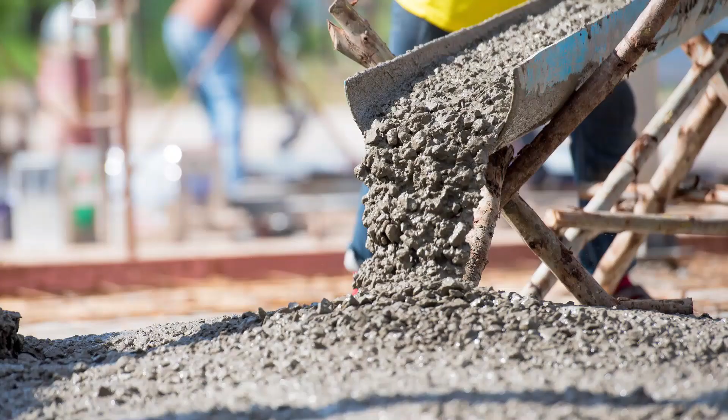So why concrete? People always ask me. Like most people here today probably have no interest in concrete whatsoever, or weren't really sure about it, or just know it was grey. So that was kind of me in 2014 when I started my degree. What I enjoyed about concrete was the complexities of concrete and how it can be manipulated for its intended use. And also because concrete is fantastic. And for me as well, I wanted to go into materials because I was very interested in sustainable development, and I knew that materials engineering would probably pioneer this. So that's a very brief introduction to me.

So name something that you know that's made out of concrete. If you type it in, it will come up on my screen.

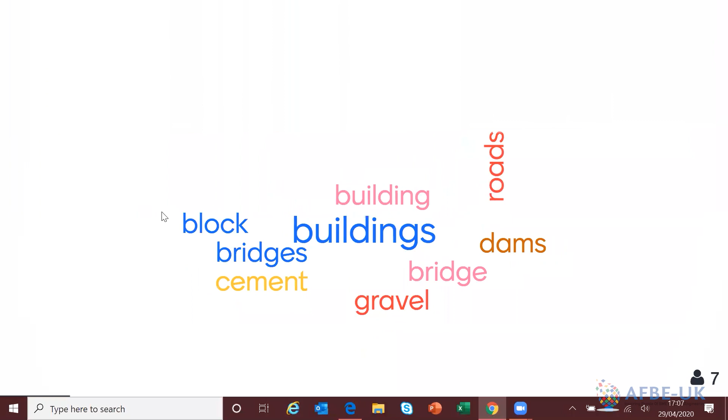So as you can see, there were various different infrastructure and buildings that people were talking about. So concrete is actually the most used man-made construction material in the world. And knowing that, you saw that there's different things that concrete can be used for. We can now know that not all concrete is the same. You can't use the same concrete for a building that you'll use on the road. And also, if there's one thing I want everyone to take away today, even if you don't listen to the rest of this, it's that cement and concrete are not interchangeable terms.

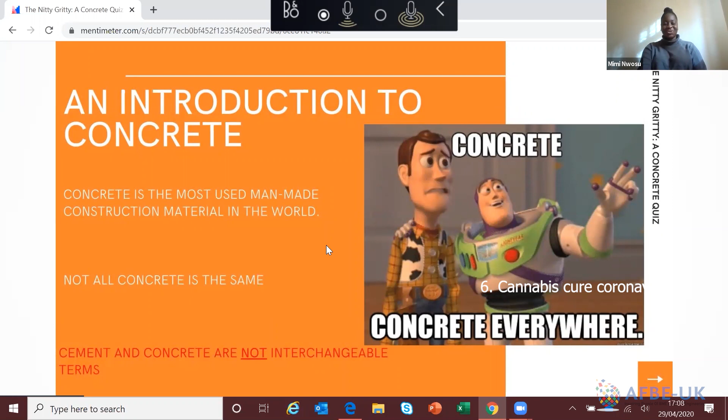If you want to annoy a civil engineer, mistake cement and concrete. They are not the same, but I'll delve into that later. So the quiz: just as I did now, I'm going to ask a question and then give you a couple of moments to answer it. And then after that, I'll give an answer straight away, and that's how the quiz will continue.

Like I said, you don't have to be a concrete whiz. Please just give it a try. It's just all a bit of fun. So let's get cracking. That is my first concrete joke, and it's the best one I had.

So question 1, what are the primary components of concrete? Is it A, cement, wood, aggregates; B, cement, water and silicone; C, cement, water and aggregates; or D, cement and water? Now, before you answer, for the non-civil engineers amongst us who are not really sure, aggregates are things like sand, gravel and crushed rocks, etc.

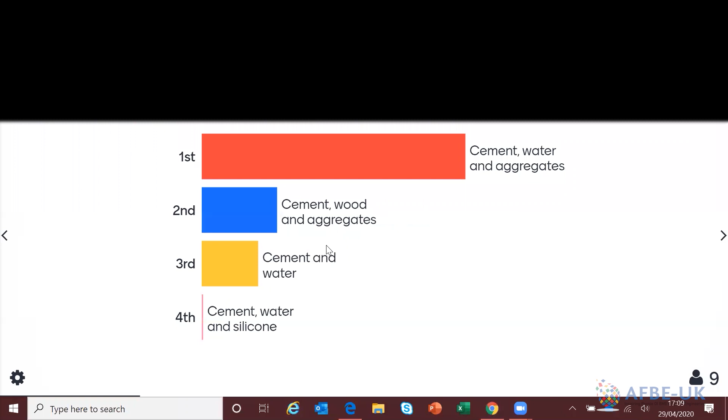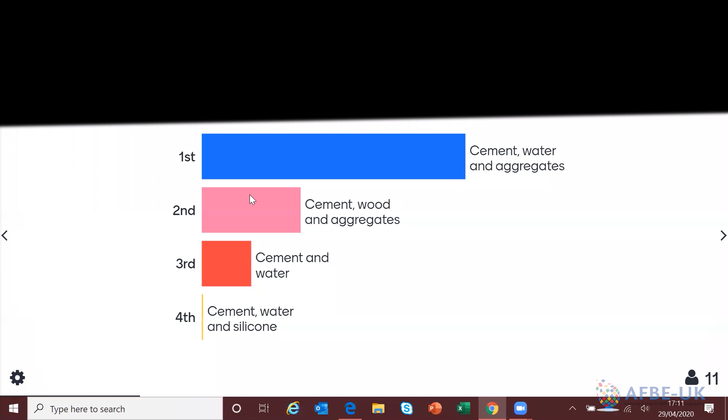Most people did all right. So the primary components of concrete are answer C, cement, water and aggregate. Congratulations to those who got it correct. So concrete is actually a mixture of 2 components. It's a mixture of aggregates and a paste, that paste being made up of Portland cement and water.

As you can see on the diagram on the left, it's made up of 8% air, 7 to 15% cement, 14 to 21% water, and 60 to 75% aggregates. Now, I like to liken making concrete to baking a cake. So I'm going to use the analogies together. I hope no one gets confused.

So with concrete, like a cake, you get all your ingredients and mix them together. You put your ingredients in the concrete mixer and mix them. Then after that, you put them in concrete molds. The molds can either be long steel beams, cylinders, or cubes. These three types of mold are used to imitate the structural components that can actually be built on site: long beams, some sort of cube, or a cylindrical shape.

Once that is completed, they'll be put on the vibrating table, which has its British standards. So why do we put them on the vibrating table? Because you want to remove any air bubbles or inconsistencies within your concrete and make sure your concrete actually sets in the right shape of the mold. Once that is complete, you leave your concrete to set overnight, and then you put your concrete into a curing tank.

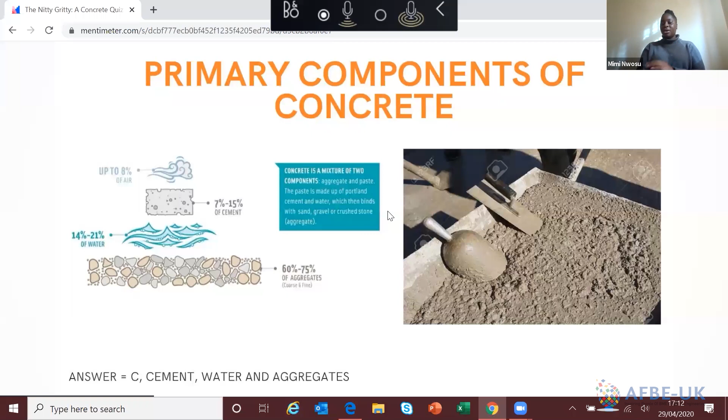So like a cake, you get all your ingredients, mix them together, put it into the baking tray, and then put it in an oven. However, an oven and a curing tank are not the same thing, but we'll get back to that later. So back to the beginning, I said that concrete and cement are not the same thing. Cement is an ingredient used inside of concrete, and concrete is the final product. I hope that's more than clear now.

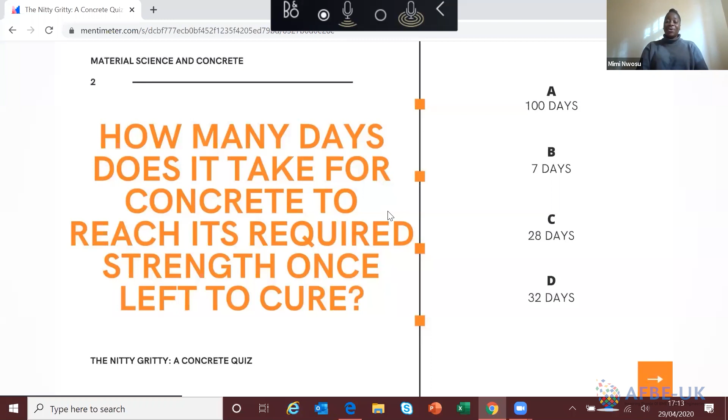So the next question is, how many days does it take for concrete to reach its required strength once left to cure? Like a cake, you put it in an oven. Cakes obviously take a couple of hours, unless you leave your cake in for days. Don't tell us, just keep that to yourself. But concrete takes a number of days to reach its required strength. So how many days do you think? Is it A, 100; B, 7 days; C, 28 days; or D, 32 days?

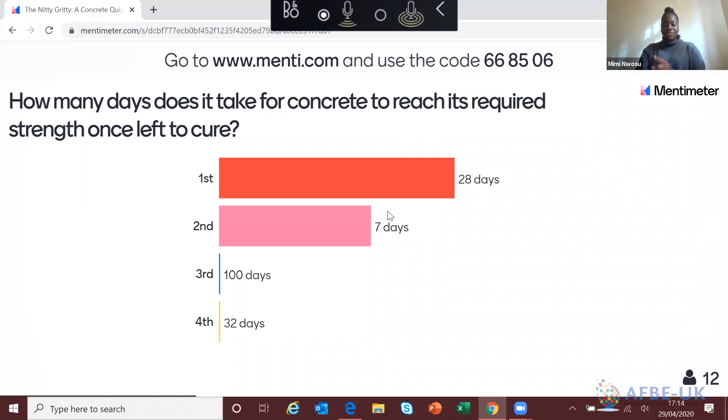So the answer is actually C, 28 days. I think it's important to understand what is actually happening during those 28 days, what gives concrete its compressive strength. An important thing to know as well is that concrete doesn't dry over time, it hardens over time. But I will come back to that later on.

So what is curing? Curing is defined as providing adequate moisture, temperature, and time to allow concrete to achieve its desired properties for its intended use. So there's water in the tank, and this water is about 20 degrees-ish. So what's happening inside of the concrete? In the curing tank, a reaction takes place between the water and the cement.

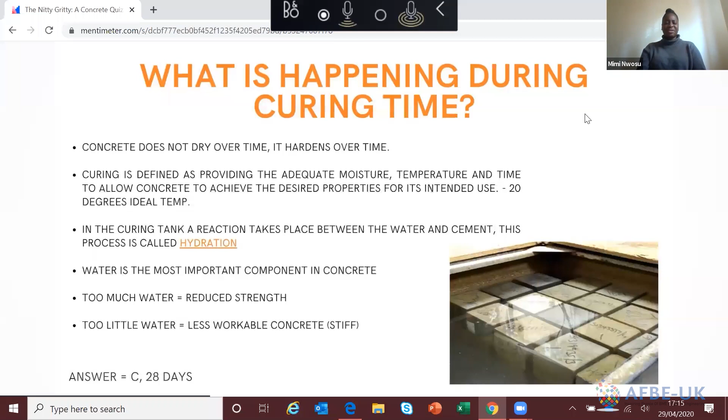This is called hydration. So back to my first bullet point about concrete not drying over time, but hardening. If you were to dry concrete, that would imply that you're actually removing the water from the concrete, and that's not correct. Because water is actually the most important component in concrete, so it's essentially needed. So too much water would reduce the strength of the concrete, but too little water will make the concrete very stiff. So it'll be hard to pour on site, hard to put in the mold, etc.

Now, let's get to the science. What I think is important when I explain about hydration and cement is that it's very important to understand the chemical composition of cement to understand hydration. So typically, cement is made up of 5 compounds. However, I know 2 of them. And thank God, because the 2 of them I'm going to talk about are the most important ones. They're called tricalcium silicate and dicalcium silicate.

So most people hear in the engineering world that with concrete, the first 7 days of the curing process is the most important. The fastest part of the reaction is. And tricalcium silicate is responsible for 7th day strength. Dicalcium silicate is responsible for the later strength. So what happens? Tricalcium silicate in the cement, when it reacts with water, produces hydrates and hydroxides and also releases some sort of energy. When the hydrates and the hydroxides are produced, they form chemical bonds, therefore compacting the concrete much more, therefore giving it strength. Now, that's in the first 7 days.

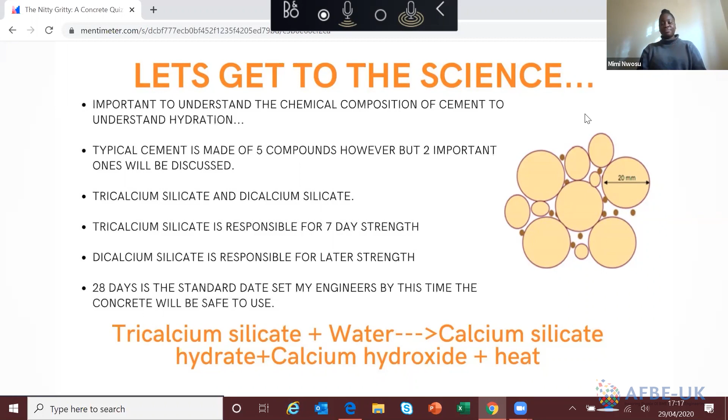So dicalcium silicate is responsible for the 7 to 28 day strength. Essentially, they have the same reaction with calcium silicate, with hydrates and hydroxide ions. However, it also combines with the 3 other compounds in cement. And this happens at a later stage, but it also happens at the beginning as well, it just happens much slower. And that's what's happening.

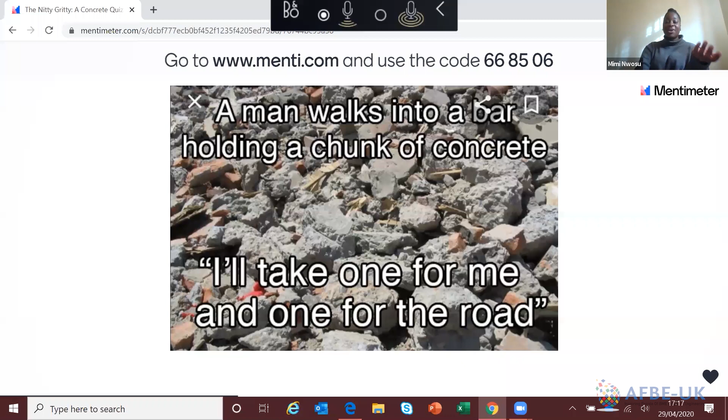So as I was doing this quiz, I found some concrete jokes along the way. I hope people understand, but a man walks into a bar holding a chunk of concrete and he says, "I'll take one for me and one for the road." Sorry, I found that funny. Maybe it's just me. Obviously, I can't hear anyone, but I hope everyone is falling off their chairs right now.

So we all heard in the news the environmental impacts of concrete. Concrete's not good for the environment, etc. But why do you think concrete is not good for the environment? Is it A, waste concrete is thrown into the sea? B, when concrete is poured on site, it releases toxic fumes? C, the production of cement releases carbon dioxide into the atmosphere? And D, concrete removes oxygen from the atmosphere?

So the answer is answer C, that cement production releases excess carbon dioxide into the atmosphere. Someone has asked me recently, if there's already carbon dioxide in the atmosphere, how does cement production affect the atmosphere? And I said, okay, well, excess. Anything in excess is not good. When you increase levels of carbon dioxide in the atmosphere, this increases the rate of the greenhouse effect. Now, I'm hoping everybody knows what the greenhouse effect is, because that is another webinar, and it's not this one. So essentially, it increases the effect of global warming, so it heats the earth up.

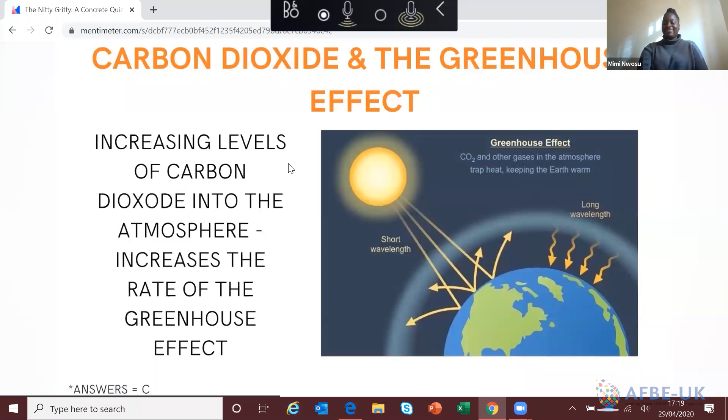So now that we know that it's carbon dioxide that is causing an issue with the atmosphere in terms of cement production, approximately what percentage of the world's carbon dioxide emissions do you think are sourced from cement production? Is it A, 8%, B, 5%, C, 45%, or D, 21%?

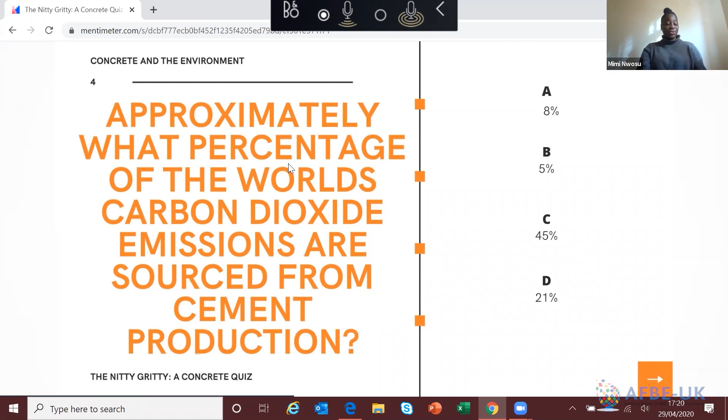So the answer is A, 8%. I really do believe if it was 45% of the world's carbon dioxide emissions, we wouldn't be using concrete ever again. So importantly, I think people should know how cement is produced. If it's causing this much problem to the environment, we should know how cement is produced. Portland cement is an industrial standard cement that we tend to use. And it's a mixture of burning limestone and clay together at extremely high temperatures. Limestone is quarried, it's crushed into small pieces, and it's mixed with sand, clay, and iron. Then it's ground to form powder, and this powder is called cement.

So cement is very, very important to the concrete industry because it's actually used in 98% of concretes globally, with 4 billion tons produced each year. So this is clearly an issue. So what happens during this? When limestone is heated at high temperatures, it goes through a process called calcination. Therefore, the limestone is calcinated, producing CaO, which is lime, and waste CO2. So as you can see in the equation below, it's the waste CO2 that's causing the problem. There's nothing that we can do with it. It just goes straight into the atmosphere. And that's that.

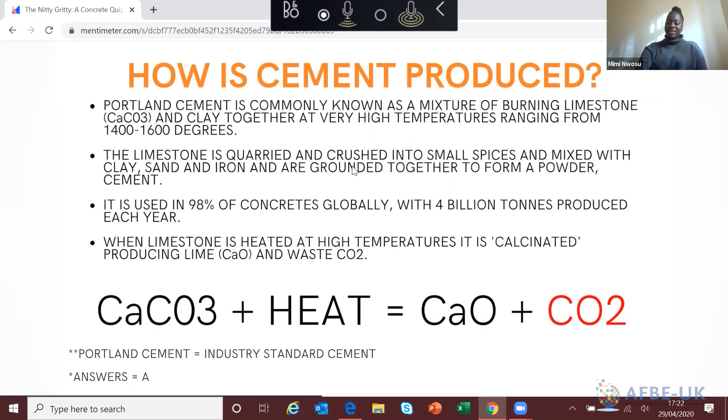Next question. So does concrete work, so normal concrete, just bog standard concrete, work better in tension or compression? So is it A, tension, B, compression, or C, tension and compression?

I promise you I will not play the music again.

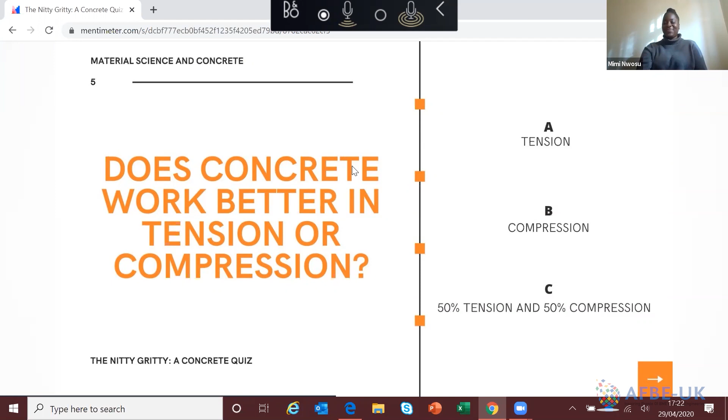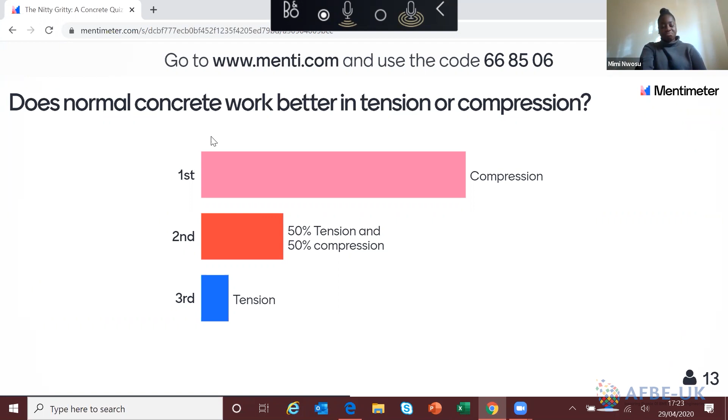Okay, so most people said compression. Cool. Right, so for the non-physicists amongst us, I think people would like to know what tension and compression forces are. So basically, every material can handle a certain amount of tension and compression, and these are called stresses. So a tension force pulls materials apart, and a compression force squeezes materials together. So that's the very bog standard, basic way of explaining both of them.

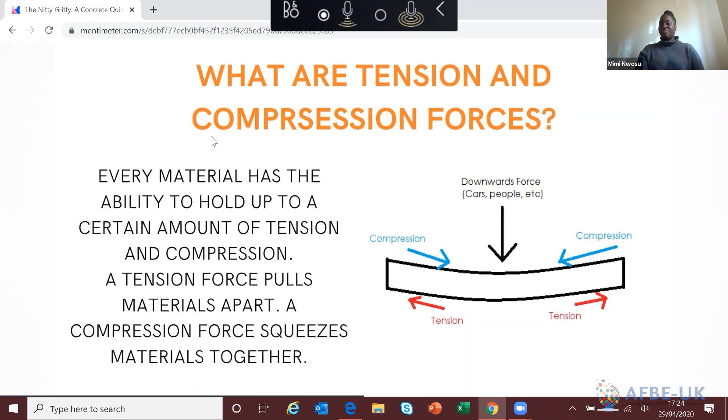So why is concrete better in compression than it is in tension? So concrete is great because it has this high compression resistance. So it's able to support loads of weight. So hence why loads of building foundations are made of concrete to support your buildings such as the Burj Khalifa, etc. So this is due to the concrete's compact nature. It has adhesives and aggregates adding to the friction factor, so it resists compression.

So essentially, when you stand on concrete, it doesn't collapse because you have to push down on the cement and also the aggregates to really push down to get to the bottom of it. So it takes longer to do that. However, if you smash concrete with a hammer, it only has to pull apart the adhesive factor, which is the cement. And that's the only thing that is resisting that tension, just the cement holding it together.

However, concrete alone is a very brittle material. So just normal concrete, if you smash it, like I said, it falls apart. So in building design, a composite material is used to counteract that concrete is weaker in tension. Actually, top tip, concrete is actually not weak in tension, it's just stronger in compression. So what we tend to do in building design is that we reinforce concrete with steel bars, and this concrete is now called reinforced concrete.

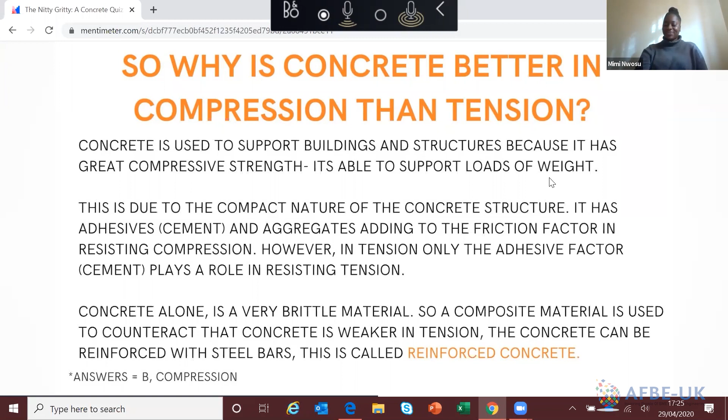So what is reinforced concrete? I'm sure somebody asked, I heard it, although everyone's on mute. So reinforced concrete is essentially putting steel bars inside of concrete. So if you look at the picture on the left, that is what we do on site. Those steel bars are designed by engineers, so they don't always look the same. It's dependent on the building size, the surface area, the amount of load your building has to take. So this affects the length and the thickness and the shape of those bars.

So they lay them down like so, like you see in the picture on the left. Then after that, you get your concrete pump and you'll pour your concrete on top of that. So what happens is, when the concrete is poured on top of it, it hardens around the steel and it forms a very strong chemical bond. So now it's a composite material. The concrete will resist the squeezing, which is the compressive strength, and the steel will resist the bending, the tensile strength. So now your reinforced concrete is good in tension and compression.

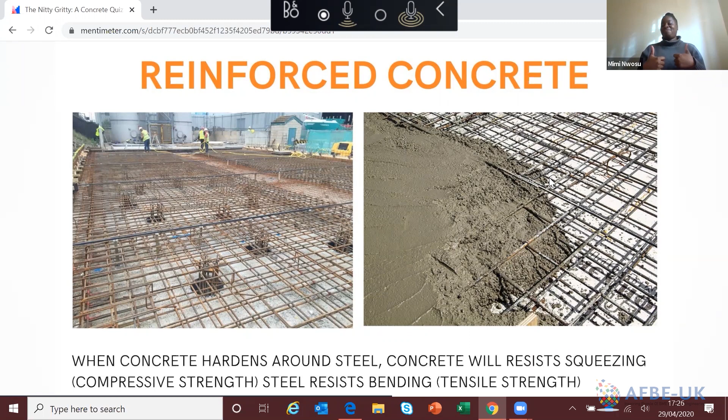Next question. So most of us have done science or done scientific experiments. You know, there are British standards associated with everything that we do. This is the same for concrete. So what do you think are the British standards that are used for concrete? Is it A, the BS 8500 and the BS EN 207, B, the BS 6500 and the BS EN 203, C, the BS 6501 and the BS EN 206, or D, the BS 8500 and the BS EN 206?

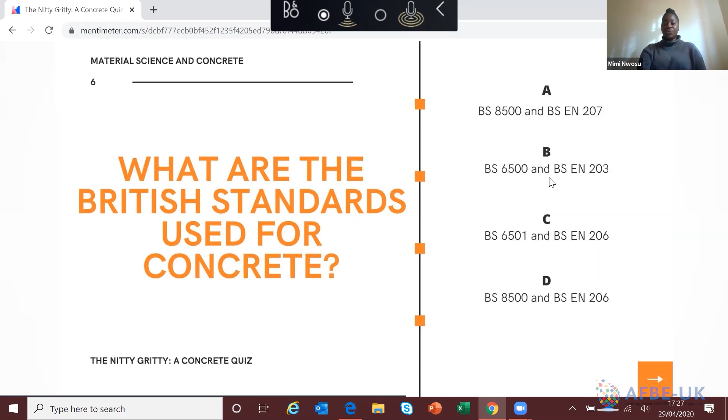So the British standards that we use are the BS 8500 and the BS EN 206. So that was answer D. So what is the BS EN 206? So this is the European standard for concrete. Essentially, it specifies requirements for constituent materials of concrete, properties of fresh and hardened concrete, and their verification.

So what does that mean? So essentially, if you want to design a concrete of a certain strength, it will tell you the materials to use, how much water to put in, what type of cement to put in, and also the tests that should be conducted on it when it's fresh and when it's hardened. And also, if you receive a concrete from your concrete producer, if you want to verify that your concrete is the concrete that you've asked for from them, it tells you how to do that too.

Now, the BS 8500 is the complementary standard to the BS EN 206 and is split into two parts. So essentially, if the BS EN 206 is this big, the BS 8500 is in two parts, but it's much smaller. So which one does everyone think I'm reading? I read all of them. So the BS 8500 is essentially the same thing. So part one is the guidance for the concrete buyer.

So if my organization asked another organization to make us some concrete, it describes how, when they send it back to us, we can verify that the concrete is what they've said it is.

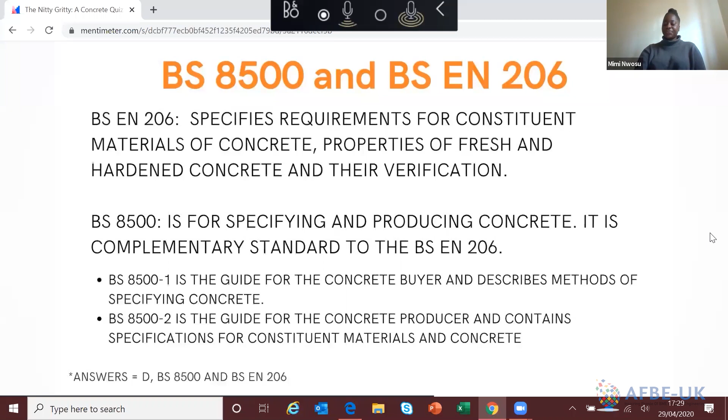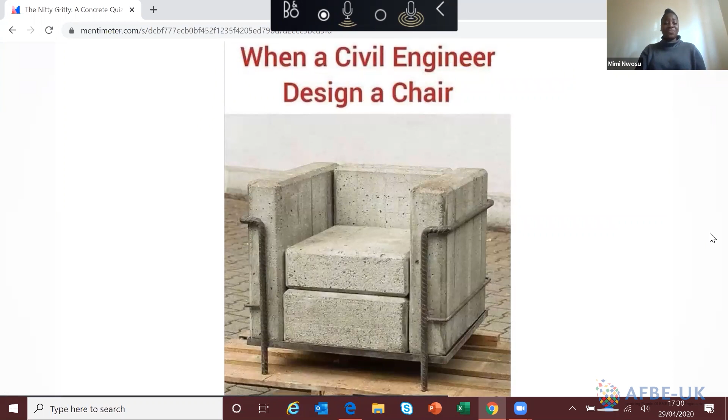So I personally didn't design this, but I found this on Instagram and I did giggle for a few minutes, and I'm sure everyone else is laughing as well. However, everyone's on mute, so I can't hear. They're laughing. Next question. Huh?

They're laughing. Question 7. Which of the following is a test that can be conducted on fresh concrete? Is it A, the California bearing ratio, B, a slump test, C, the compressive strength test, or D, the plasticity index test? So I'll give people a few minutes.

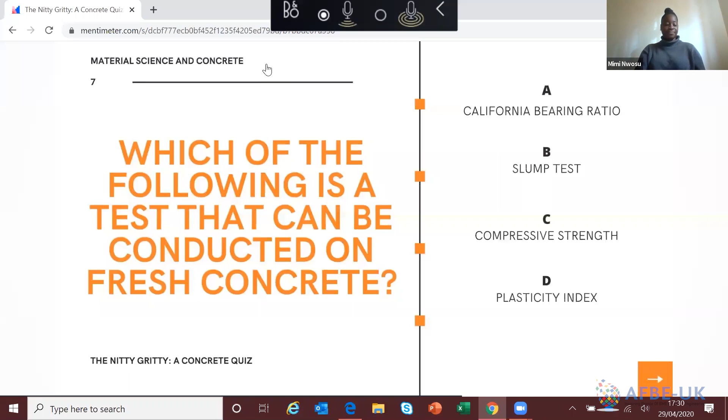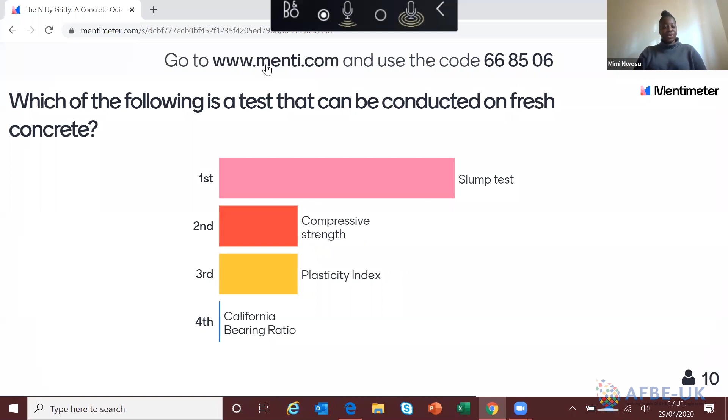So the answer is a slump test. So what is a slump test? I heard somebody say there, everyone's on mute. The slump test is a means of assessing the consistency of concrete. So essentially it's a test to say whether you've put the right amount of water into your concrete. As I said in the beginning, water is the most important component when it comes to making concrete, and there's a whole test dedicated to finding out.

So if anybody wants to confirm what I'm saying, you can read the British Standard, which is the BS EN 12350 Part 2, testing fresh concrete, slump test. So how do you perform a slump test? You need your concrete, obviously, your metal funnel, a metal rod and a ruler.

So once you're finished mixing your concrete in the concrete mixer, like we discussed in the beginning, you'll take a volume of that, which you'll find in the British Standard, and then you'll put it into your metal funnel in 3 layers. You put the first layer in, then you use your metal rod and you'll tamp it 25 times. Then you put your second layer in, and again tamp it 25 times. Then you'll put the third layer in, and tamp that 25 times.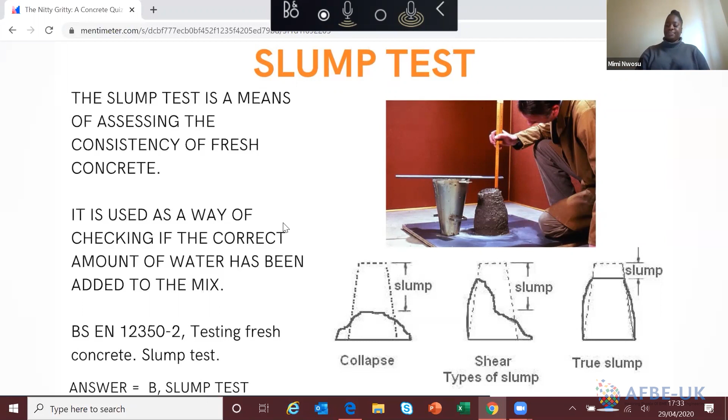So why do we test on concrete? We test on concrete because you want to look at factors such as strength, consistency, the unit weight, the air content, and temperature. So by testing on fresh concrete, you're actually able to detect changes that may affect your concrete long term. So if you have too much water and you start to cure your concrete, then you may not be able to achieve the properties that you actually set out to achieve because maybe there's too much water, but you wouldn't know that if you didn't test it whilst it was fresh.

So essentially you're saving time and money, which is what we want to do in construction. Time and money. Time is money.

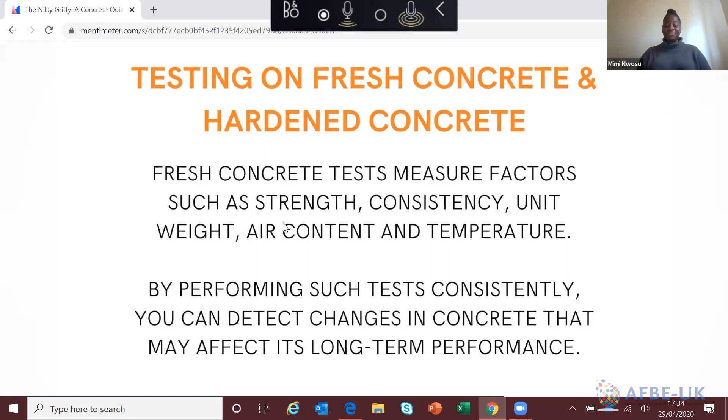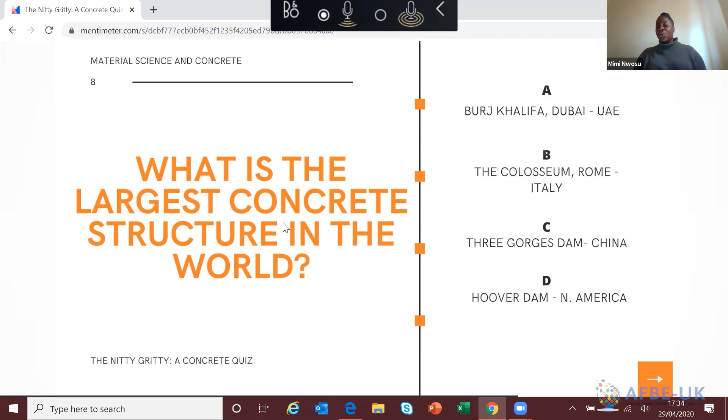Next question. So what is the largest concrete structure in the world? This question will let me see if people have left the UK, left London, ventured out a little bit. I'm only joking. But A, is it the Burj Khalifa in Dubai? B, the Colosseum? C, the Three Gorges Dam? Or D, the Hoover Dam in North America?

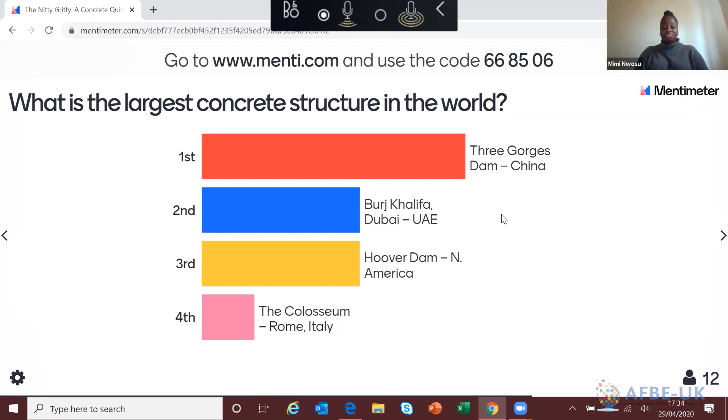So the answer is the Three Gorges Dam in China. The Three Gorges Dam is a hydroelectricity dam, so this generates electricity essentially through hydropower. It was completed in 2003 and it stands at 185 meters tall, approximately 2,300 meters long, and it is 40 meters wide. So that's a lot of concrete, basically. How it generates hydroelectric power, I'm not exactly sure. That is something that we can all go and look up later.

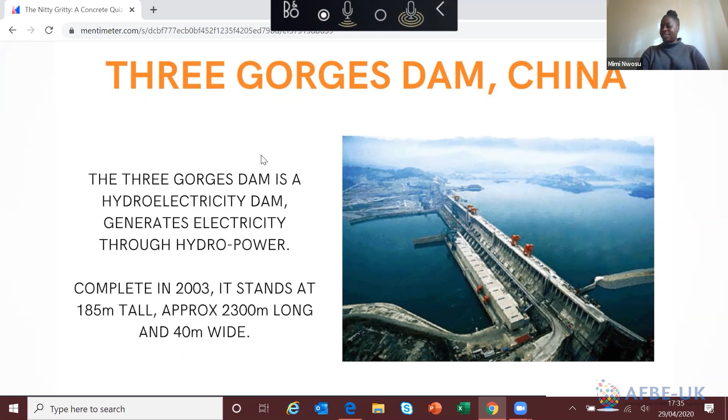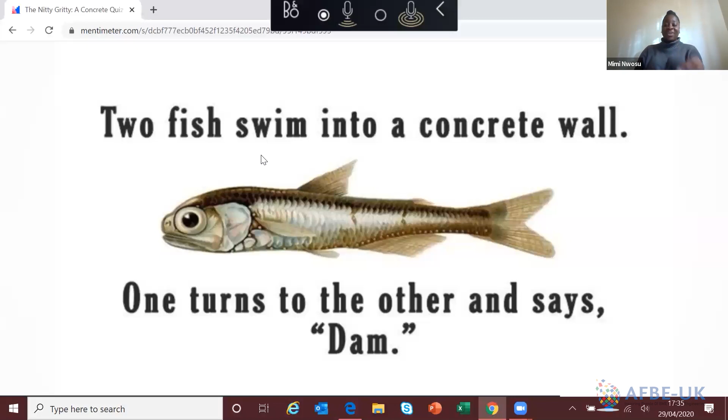So conveniently, as I was looking up the concrete dam, I found this concrete joke. So two fish swim into a concrete wall. One turns to the other and says, damn. Sorry. The fact that everyone's on mute, it seems like I'm laughing on my own, but I'm sure everyone's falling off their chairs right now.

So we've spoken about a lot of sectors about concrete. However, I did forget to ask in the beginning, how far do you think the origins of concrete date back? Is it A, the Romans, B, the Egyptians, C, the rise of the British Empire, or D, the early Nigerians?

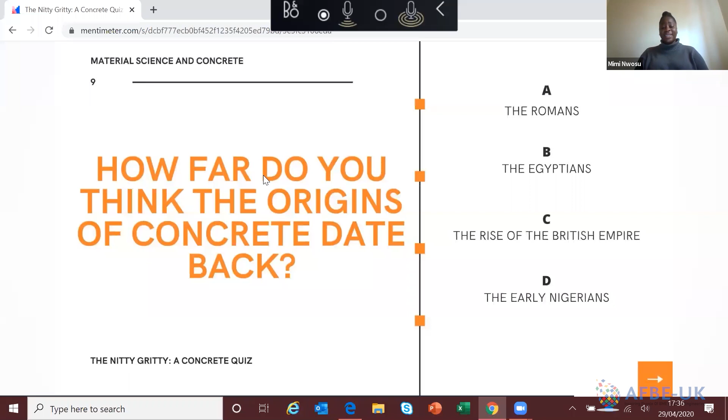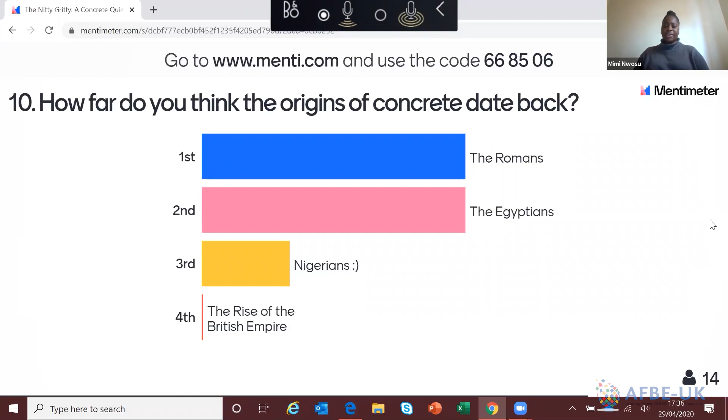So, for those who had no faith in Nigeria, the answer was the Egyptians. Concrete actually dates back as far as 3000 BC. The Egyptians actually used lime and gypsum, which is now one of the components of concrete that I spoke about earlier. Lime and gypsum, which is actually very similar to concrete.

So the pyramids that we know today, the pyramids of Giza, don't know how people pronounce it, the Egyptians used lime, gypsum, straw and sand, hence the colour. So that was their early forms of concrete. So it's quite nice to know when I discovered that actually the pyramids are made of some sort of concrete. But it's obviously not the concrete that we use today.

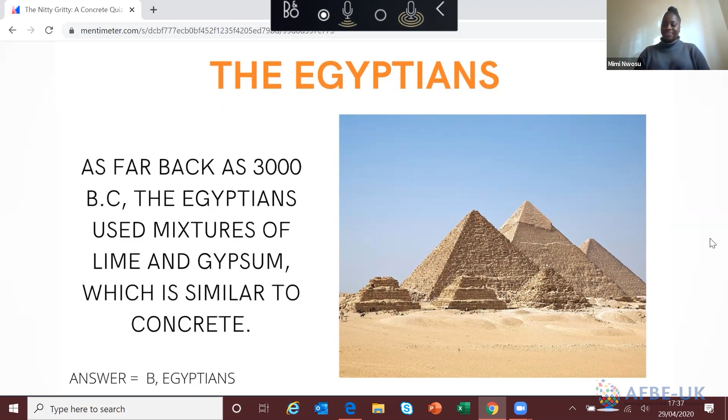Now, lastly, and this is an important fact that I think people should know about concrete, and why it's used in a lot of building design. So for me, this is my most important fact. Concrete does not burn, it cannot be set on fire, and it doesn't emit toxic fumes when affected by fire. This is due to concrete's excellent performance due to its primary components. When the cement and aggregates are bound together, when you mix them, they become inert. So inert meaning they do not react with anything. So this is very important for building design and fire safety design.

Also, concrete has a slow rate of conductivity, heat transfer. This enables concrete to act like a fire shield and also protects itself from damage. So what that means is, because concrete is a very dense material, a concrete block is very dense. When you set fire to it, it takes a long time for the heat to dissipate through the rest of the material. So therefore it acts like a shield. So only the face of the concrete will essentially take most of the damage, if it does damage.

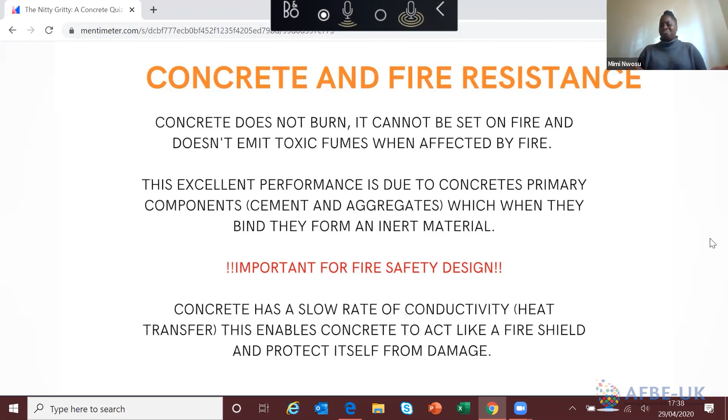So whilst doing my dissertation, I did a short study on a school in Cheshire. Typically, a fire can reach about 500 degrees in 10 minutes and 950 degrees in 1 hour. So this school in Cheshire, the whole department was set on fire. So this was 18 classrooms. However, the impact of this fire was very limited because of the fire resistance of the concrete structure. So essentially, the structural integrity of the building was still there.

It was only the furniture and the extras, maybe the paint, etc., inside that was damaged, and the plasterboard, etc. So when I was reading the article, one of the teachers was saying that they were afraid that they'd have to postpone teaching until next year, etc.

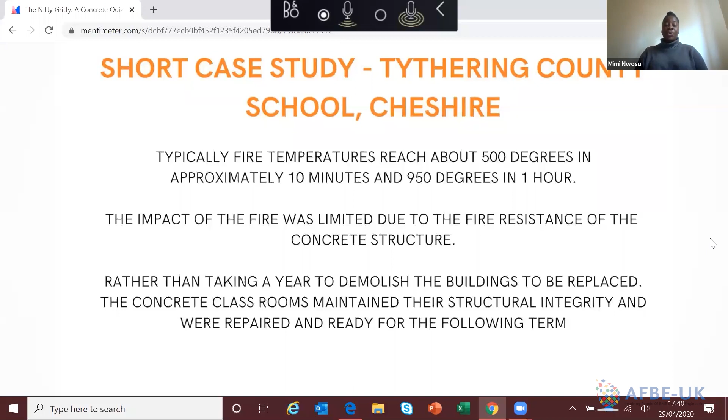However, rather than taking a year, they didn't have to demolish the building to rebuild it up again, because the building still had its structural integrity and most of the classrooms were actually maintained. All they had to do was repair the concrete and it was ready for the following term. So rather than waiting a whole year, all they had to do was wait 3 months and they were back in their classrooms again, good as new.

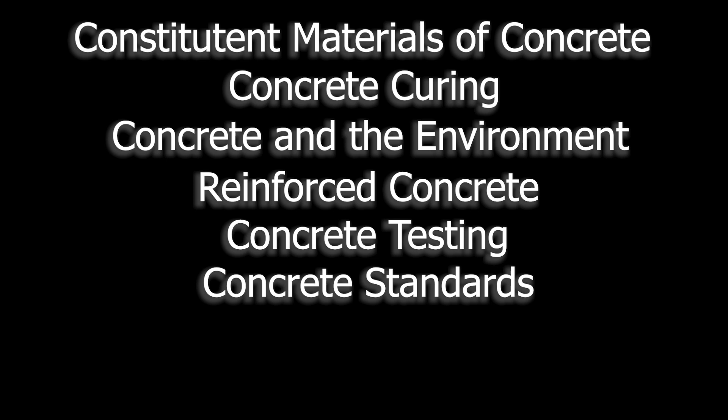So that's coming to the end of my webinar. Just a few things that we have covered today. We looked at the constituent materials of concrete, concrete curing, concrete and the environment, reinforced concrete, concrete testing, concrete standards, the history of concrete, and concrete and fire.

Now, I think my webinar lasted about 40 minutes. So you've learned all this in 40 minutes. It took me 4 years to learn all of this. So I think I'm doing everyone a favor. So congratulations. Thanks so much. So congratulations for making it to the end and not leaving. And I am very fun at parties, number one. This is usually me at a party. Final question. Don't run yet. Final question, importantly for me.

Did you learn something new today about concrete? Yes or no? If you say no, I'm going to assume you have a civil engineering degree. Yes, I did. You did? Yeah. Absolutely. Yes, I did. Oh, I'm so happy to hear that. I learned something. It was very good. Thank you. I'm really happy to hear that.